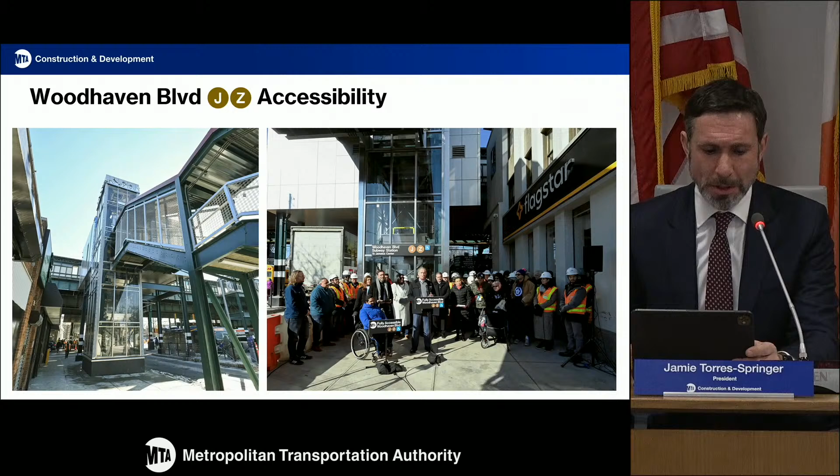Basically, we avoided relocation of a water main, working with our partners at the city to figure out how to continue to provide water service on the Upper East Side without fully relocating the main. And then we saved $21 million through effective project management that gave back allocated funds during construction that can be used for other improvements in the capital program. So $30 million savings on 68th Street, Hunter College.

We also, at the beginning of this year, opened Westchester Square, the first ADA accessible station of the year, 3 new elevators, a dozen stairways rebuilt or refurbished. That project brought in on budget, also an enormously complex project. And then last week we opened Woodhaven Boulevard on the J and the Z.

We saved on that project $40 million before a shovel was in the ground because we determined that based on how wide the street was and the difficulty in landing elevators at the mezzanine, we innovated and brought the elevators direct to platform. That saved us $40 million by not having to basically fully rebuild the mezzanine and add additional elevators to get there.

And we are using that innovation on at least 2 other stations within the 2020 to 2024 program. And we've tasked our stations business unit with looking for as many direct-to-platform elevator opportunities as possible in the more than 60 ADA accessible stations that we'll have in the 25 to 29 plan. It's an easier path of travel for our riders, and it saves us money and it saves us time getting stations done. So $40 million before a shovel was in the ground, and then $8 million additionally saved during construction.

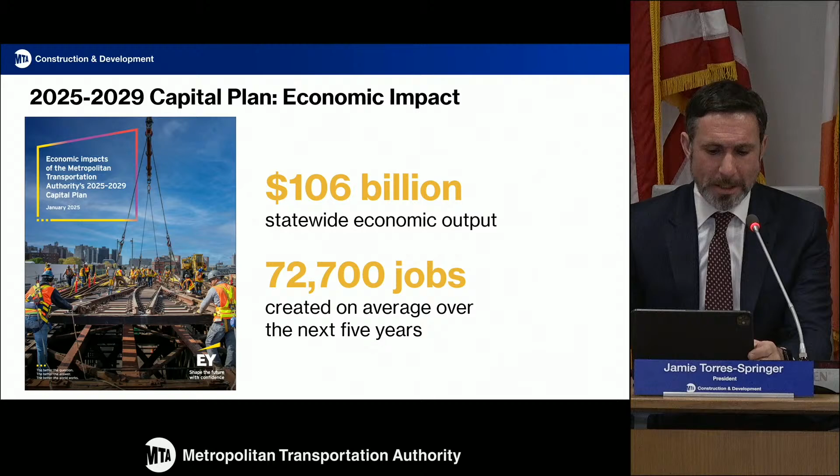We've got to get them working 100% reliably, which is something we're very much collaborating with New York City Transit on and holding Cubic accountable for. But as all that work gets done, all of our ridership groups are going to be able to use OMNY in a seamless way. And it's a much more user-friendly form of fare payment.

It's going to be available for everyone, save time and money for everyone as we get this completed this year.

Turning to future capital projects and the future capital program, we remain positioned and getting stood up as much as possible to be able to execute projects within the 2025 to 2029 plan. As was mentioned by one of the speakers, last week the Partnership for New York City rolled out an independent assessment of the economic value of our proposed 25 to 29 capital program and demonstrated job creation all across New York State from work within it.

So, as a former economic impact analyst, I can just geek out a little bit to say that a 150% multiplier on a $68 billion program demonstrates a significant return. We have the need to maintain our $1.5 trillion asset through this investment, but we also are showing a direct, indirect, and induced return on the money that gets spent all across New York State. And those 72,000 jobs, those are good jobs. They're high-paying jobs. Many of them are in regions all across the state, everything from providing equipment, obviously labor force that's employed on our projects all across the region, as well as rolling stock, which increasingly is getting produced in other parts of New York State. So very exciting results from that independent assessment.

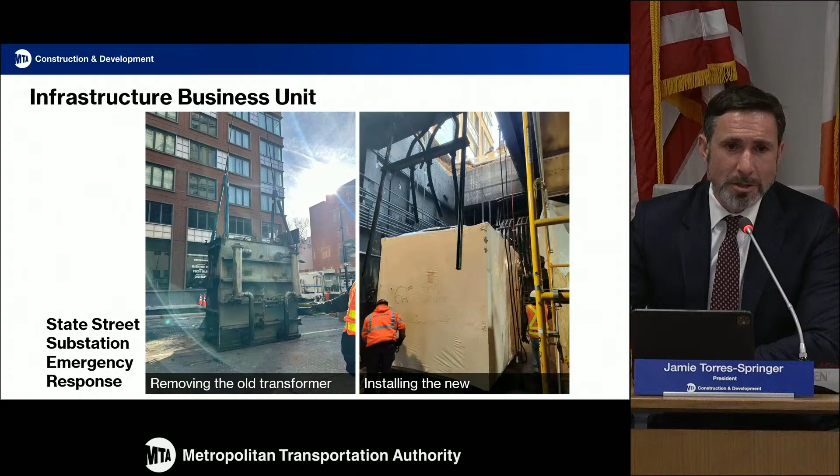And as we transition to the report from our infrastructure business unit, I just want to emphasize a couple of important points. First, this is absolutely critical state of good repair work that we're going to be talking about today, and everyone knows it's the focus of our next capital plan. 90% of the capital plan is dedicated to state of good repair. This business unit, the infrastructure business unit, doing New York City transit work alone represents about a third of C&D's work, and it is the stuff we keep talking about to keep the system running. Tunnel structures, elevated structures, power, back-of-house facilities, and resiliency.

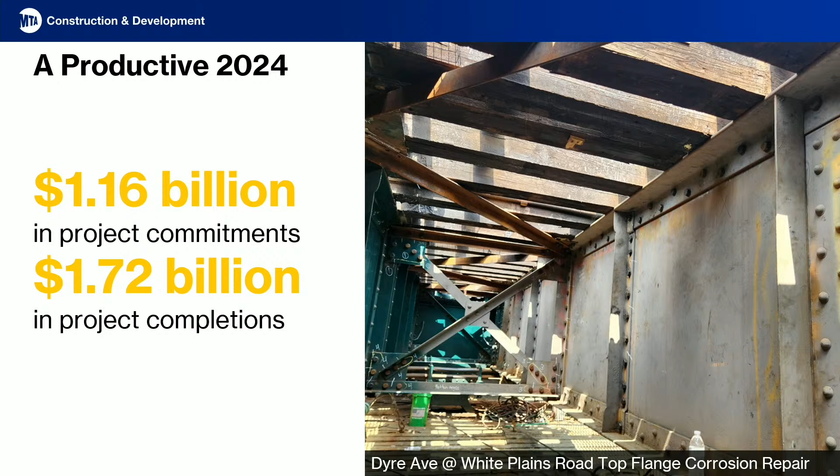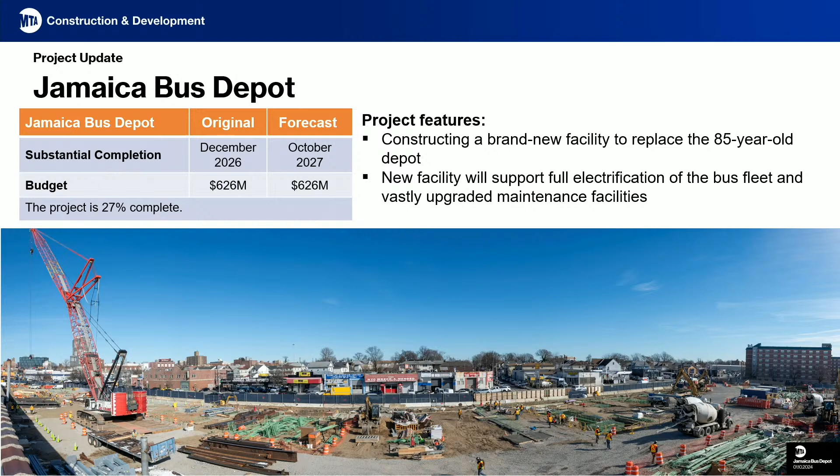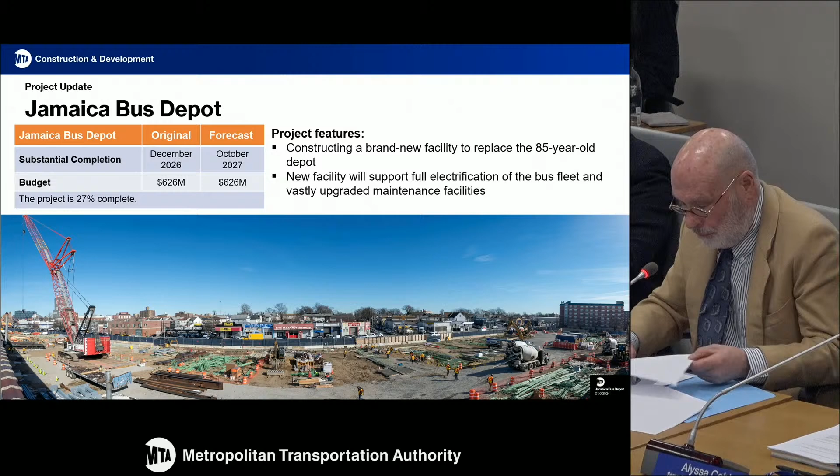So just a little bit different today. After Peter Koner, who's the head of our business unit, presents on status, Mark Roche, who is responsible for our delivery program and innovation across the whole delivery program, is going to tell us about 4 significant ways that we're saving precious dollars by innovating in how we deliver within the infrastructure business unit. And then finally, we'll hear from Alyssa Cobb-Conan, who's the new head of our planning department at C&D, about what's in our next capital plan and how the planning for that work is progressing. So with that, I'll hand it over to Peter.

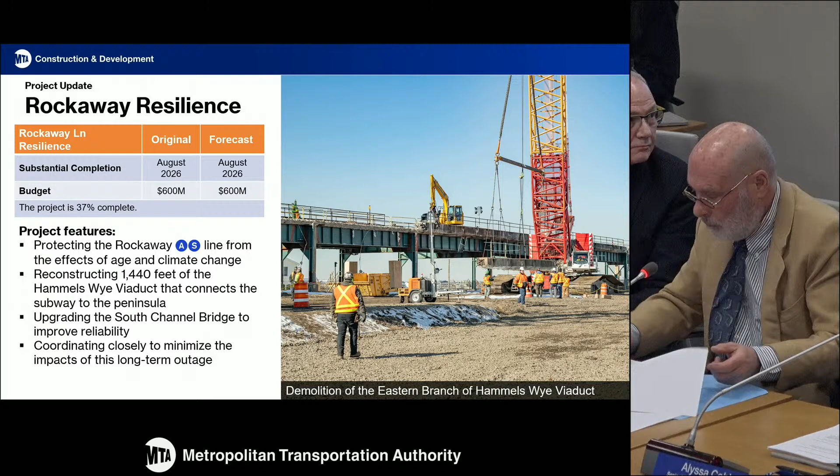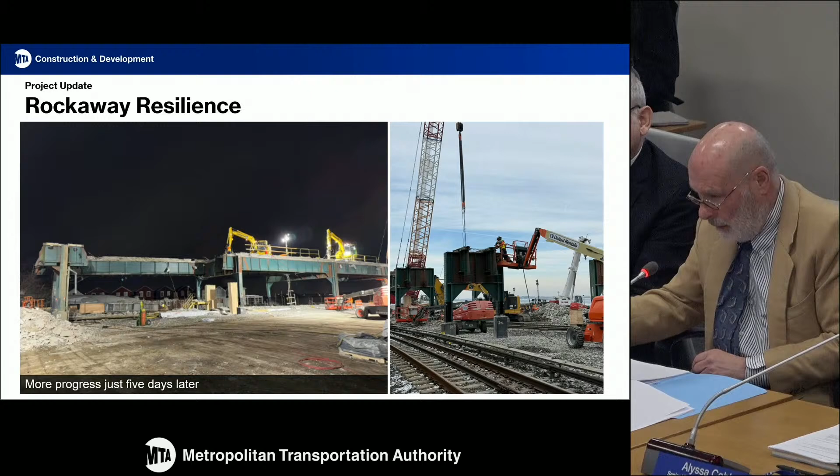The project has not accepted this delay, and we're working very diligently to reduce this delay to make sure that we deliver the project, if not on time, with a minimum delay. The forecast EAC for the project is $626 million. It's running through the budget.

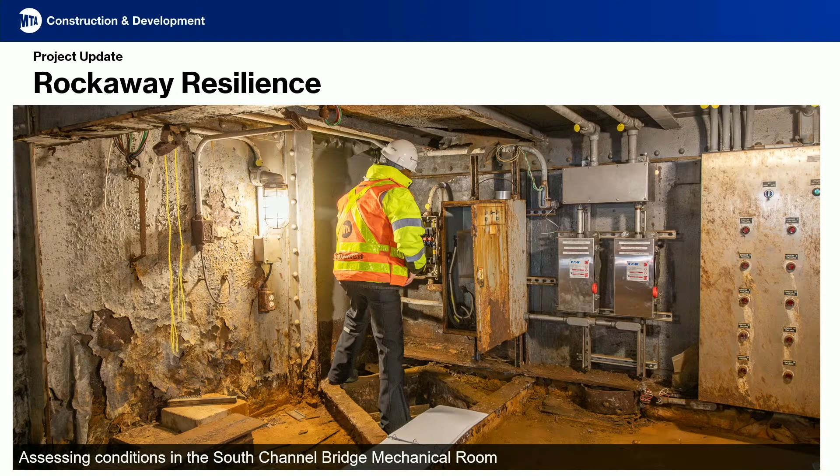Peter, let me just jump in, because I know we haven't accepted the delay. The delay is largely because of permitting issues, which became complex. But what we see here in the image, this is the new Jamaica Bus Depot facility. Yep. Actually, the steel started going up last week. Right. That building is not behind, right? That building will be delivered on time so that we can transition to the new facility on time.

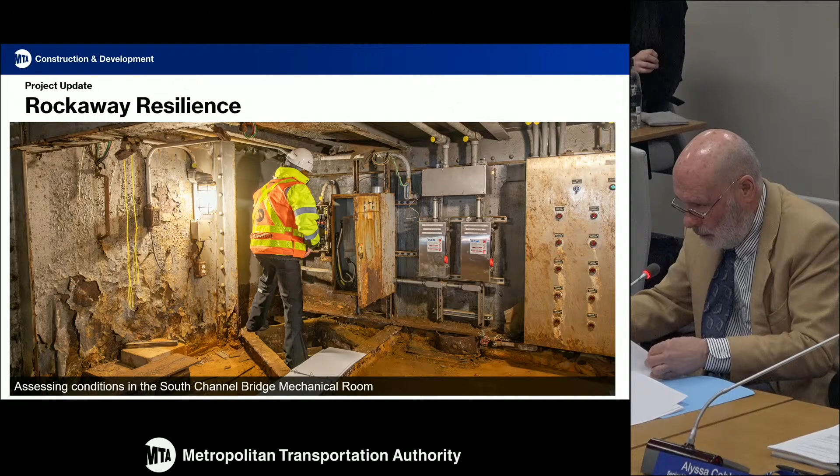At the moment, it's the demolition of the old facility and reconstruction of that component of the site. It's right next door that's running behind, but you're trying to make that up. I just want to make sure that's clear, because in terms of us delivering a project that we need for service, that's in good shape.

Our next project that I want to talk about is something that Jamie already alluded to. We have a bunch of photographs that probably are not true any longer because the project is really moving very fast. It is a replacement of the Hammels Wye viaduct, a 1,440 feet old structure that has been deteriorated through salt and the corrosive environment near the water.

As also mentioned, we are going to be completely refurbishing the South Channel Bridge that has been the bane of existence for the Rockaway folks because the bridge many times did not either open or close properly. The 17-week shutdown is afoot, and it's going very well at this stage of the game. I feel that we will be able to deliver this project, as stated, by May 19 or perhaps sooner. So the project is on schedule and budget.

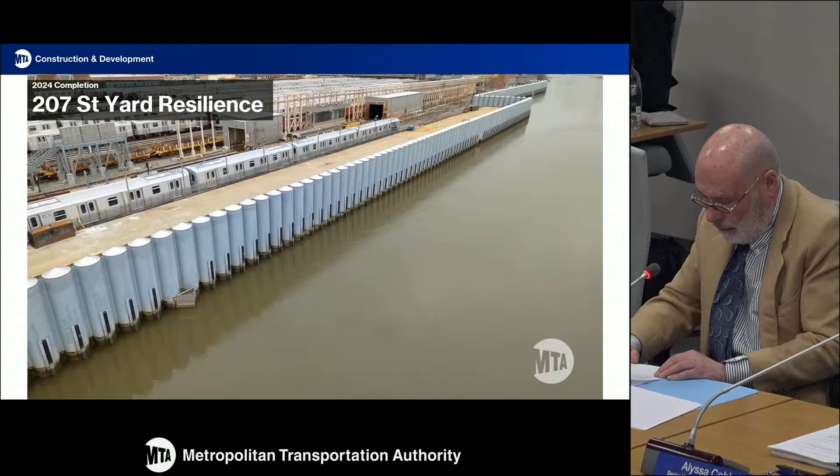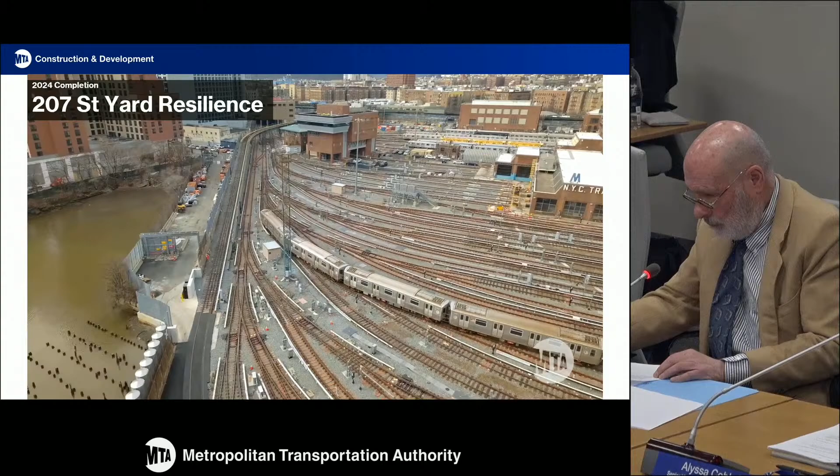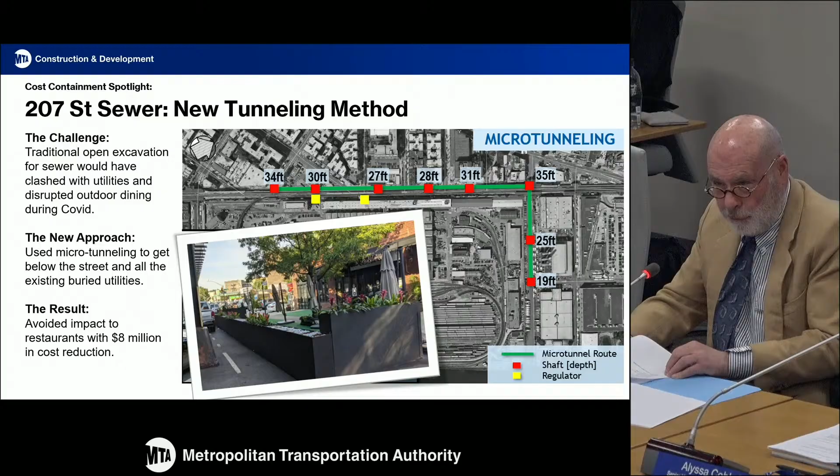Bus radio, this is a project that has been talked about for quite some time now. We had a contractor that has not really done well for us. It was a design-build project. However, I'm happy to report that the team delivered, end of this year, a project that provides fully functional voice and digital communication, enabling nearly 6,000 buses to communicate seamlessly with the bus command center.

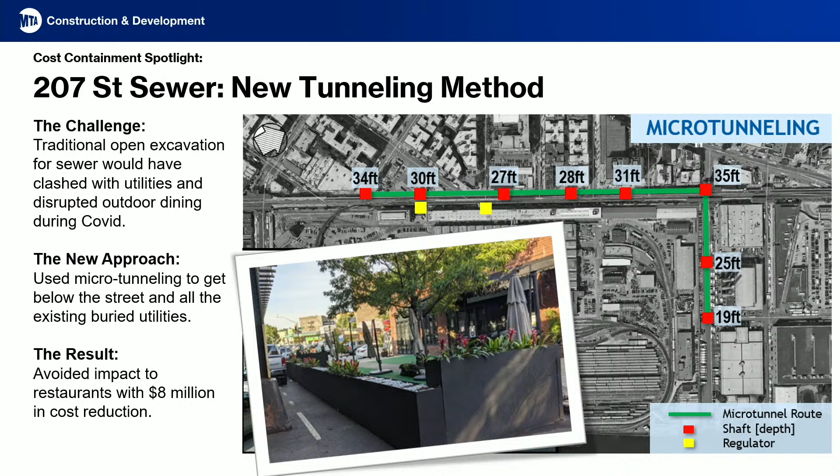We equipped the BCC, the bus command center, with new hardware and software to support computer-aided dispatch for the entire bus fleet and non-revenue bus support vehicles. We installed 35 base stations across the 5 boroughs, including parts of New Jersey and Yonkers, to ensure comprehensive coverage for the MTA bus service throughout.

Right now, you will see a little bit of a flyover over the 207th Street, a legacy project that has been with us since 2018. This is the second largest center in the New York City Transit repertoire, right after Coney Island. What you see here is 2,100 linear feet of resiliency wall that was built.

What you see, that little detent provides for a high-pressure gas valve for Con Ed. We have replaced 35,000 feet of track and 83 switches, upgraded the signal and power. Here you see a brand-new building for the signal and RTO tower, one of 2 that we built, and upgraded all the necessary infrastructure within it.

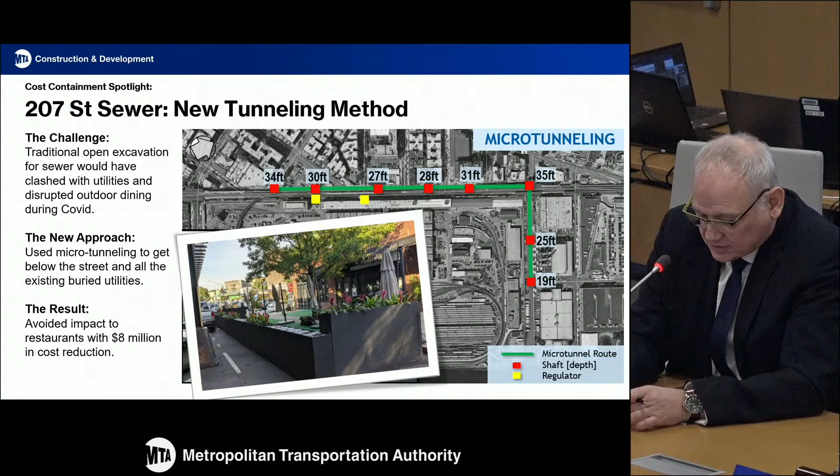Additionally, we installed a water line to service the fire suppression system for the building that you just saw, which is Building A. More of the same. What I would like to say is that this project was really done in cooperation with New York City Transit with minimal disruption to the system. And that concludes my delivery for you. I'm going to take it from here.

All nice photographs and videos from Peter, but there's things going on behind the scenes which I think are worth everybody knowing about, that I think prove faster, better, cheaper. I'd like to say faster, better, cheaper, cleverer, but I leave it with the first 3, okay? Look, Peter showed a nice video. In the background here, you can see the 207th Street, and you can see the restaurants in the street that are on 10th Avenue there.

One of the things that happened during Sandy, not only did the water come from the river, it also came up from the sewer system. It blew all the tops on the sewer manholes and came right up into the system. So to make this resilient going forward, we've shifted the sewer outside of the facility. And what you see in green there is the new line of that sewer. Every time we touch a street, it costs us millions of dollars. Every time we touch a street, we hit every single utility in the land.

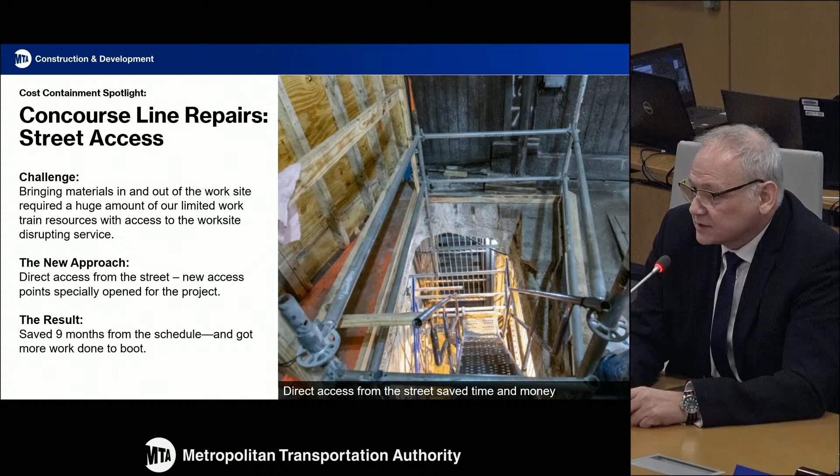This time, the team did something very different. We put the sewer 30 to 35 feet down underground. First time we've done that in MTA. And we tunneled the sewer instead of digging out the sewer. That's a first for us. It's providing us with a toolkit which we have never used before. I think we've already got 10 projects that use this method now to advance and save money on other projects. What it's done is it avoided us getting involved in the street.

It avoided us during COVID having to take away all of those street restaurants. It got us to a specialty contractor who knew what they were doing. We contracted with them directly to get the best price. This project, though it took a year longer to get it going, finished on schedule and $8 million ahead of budget. A unique way for us to involve a specialist, and you'll hear lots of specialists coming in as I talk today. The ability for us to avoid utilities is a strategy across all of our projects, and this is just the latest demonstration of how we're getting out of the way of utilities.

It's a very simple one, but it's extremely important. How do we get to our projects is becoming a major cost factor in bidders' work. I sit down and look at the costs of bids pretty much every day. I talk to contractors after they've prepared their bids and say, why did you bid that price for these projects? And every time they say, well, I had to bring this piece of material in, I had to walk this mile to get to the track, I had to bring all that hard stuff that I've got to carry, the guys are tired, I'm not getting the productivity. It's costing us 10, 20% in our projects just to get to the work sites.

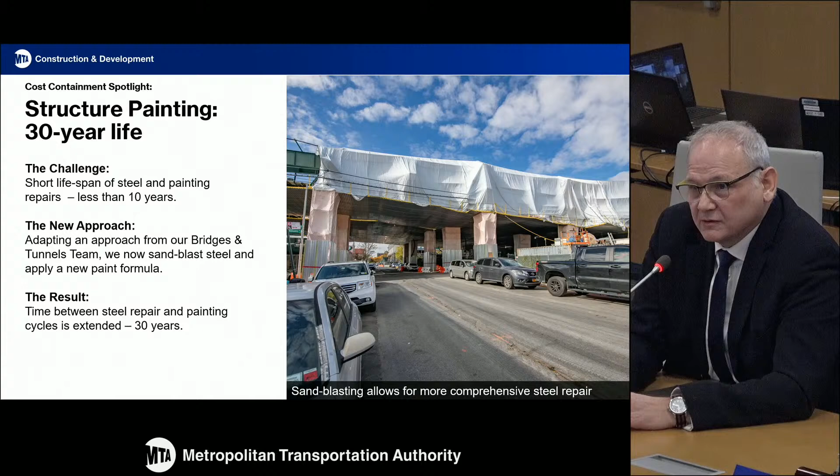Well, Peter's team did something completely different on the Grand Concourse line. They dug a hole, real clever stuff here. But they dug a hole right in the right place to stop all that long cost and all that time it takes for us to get to projects. And that is a bigger picture here that we are seeing in lots of projects. We only have a certain amount of equipment to bring materials to site. We only have a certain amount of flat cars. Every time we bring material to site in tunnels, on bridges, it affects service.

So more and more, we are taking away the expectation that contractors can use our facilities to get in and get to work. In this particular case, we got 40% more work done at the same price and got out of there 9 months ahead of schedule because we dug one hole. How do we get more and more access as we go along is a key factor across all of our projects.

We've talked about this one a couple of times before. We are saving hundreds of millions of dollars in how we're doing painting. When we spoke to you last time, we said we were going to try a new way of painting, to stop the idea that we're only minutely cleaning the steel and then painting over it. I'm not sure anybody here would do that in their own home.

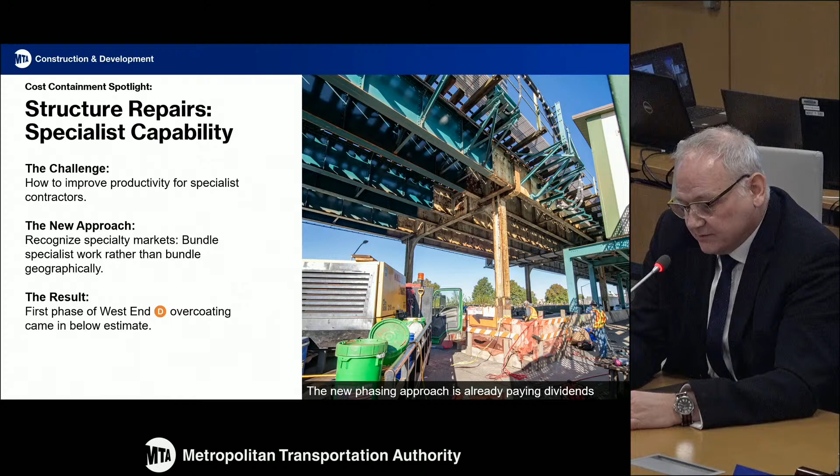What we do is we sandblast now. We've taken the lessons from B&T and all those guys on those big bridges who make their painting systems last 30 or 40 years, and we've applied that technology to our projects. So we only repair this particular structure once in 30 years, compared to what we were doing in the past few years before C&D, repairing the structure every 10 years.

Not having to go back to repair these structures in the 2030s or 2040s, only in the 2060s, is saving hundreds of millions of dollars in how we're approaching the maintaining of structures. It's a completely unique thing, and given that $5 billion is allocated in the upcoming proposed capital program for transit structures, that's $5 billion we don't have to spend in 2030 and 2040. Let's see if we need to do it in 2060.

Major improvements in preservation of our assets. This is a subtle one, but how do we get our specialists to do better, to be more productive? We have specialists all over all of our business units, and in this case it's a series of contractors who are very good at repairing steel. We met with them a year or two ago and said, how can we get more out of you? And the outcome was, well, give us more to do.

We took that to mean, okay, we're going to get you to repair the column bases, the columns, the beams, you're going to go up on top and repair it. And lo and behold, we got prices back that were 20% higher than expected. Our specialists turned out to be afraid of working on top of the structure because it has to do with closing down tracks and managing outages on trains. We don't want to spend that extra 20%, and we don't want the hierarchy of contractual problems that implies.

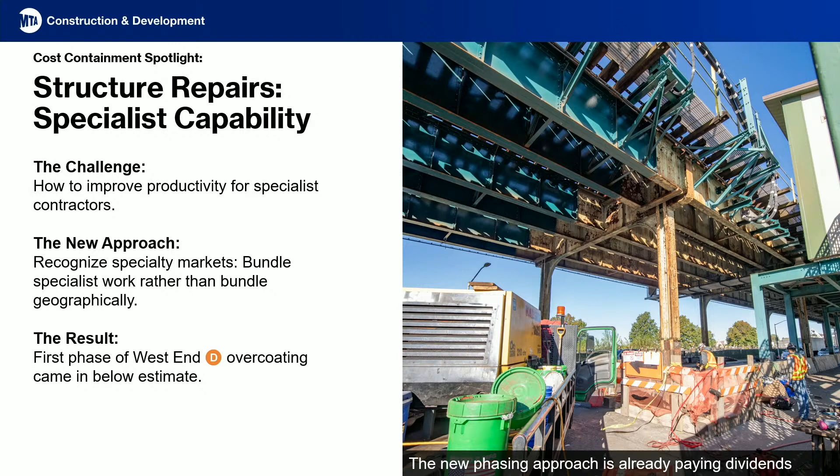In the coming months, as we give you more details, you'll see that a lot of these specialist contractors and specialist ways of working need special handling, and we need to understand our market better. We've been working with our vendors to see how to get them more productive, and that's a theme you'll see in lots of projects going forward. Thank you.

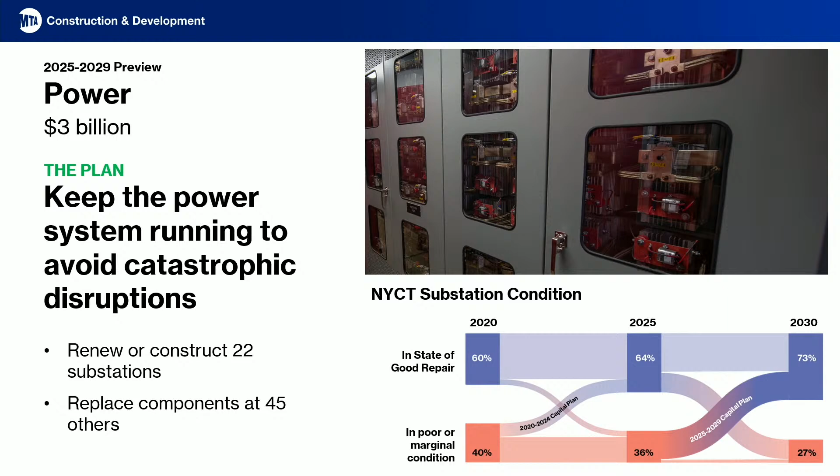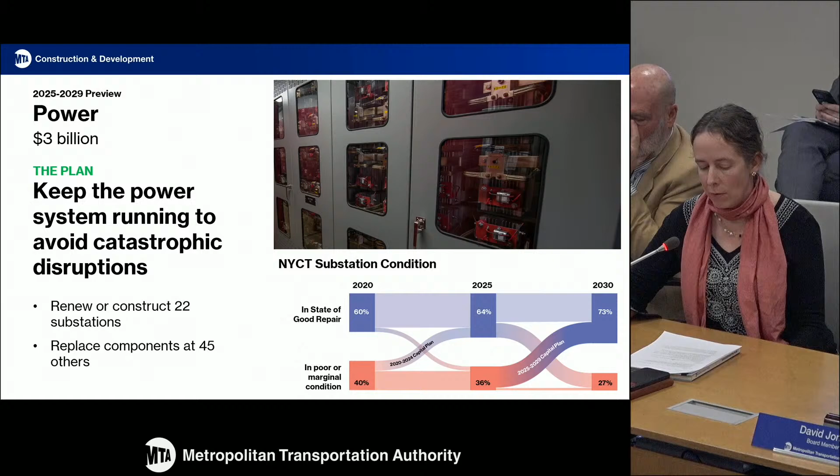I just want to echo one thing. I had the good fortune, or misfortune, of taking over East Side Access ten-plus years after it started, and brought that project in successfully. The hugest issue of productivity and cost was that the project had been designed to bring all the manpower, materials, and equipment from the Queens end, having to traverse the entire tunnel in many cases. Mark knows this. I'm not sure this approach would have been possible on that project, because we were trying to protect Garodnick's beloved Midtown from the impact, avoiding disruption to the Manhattan Central Business District, but it was hugely inefficient and costly.

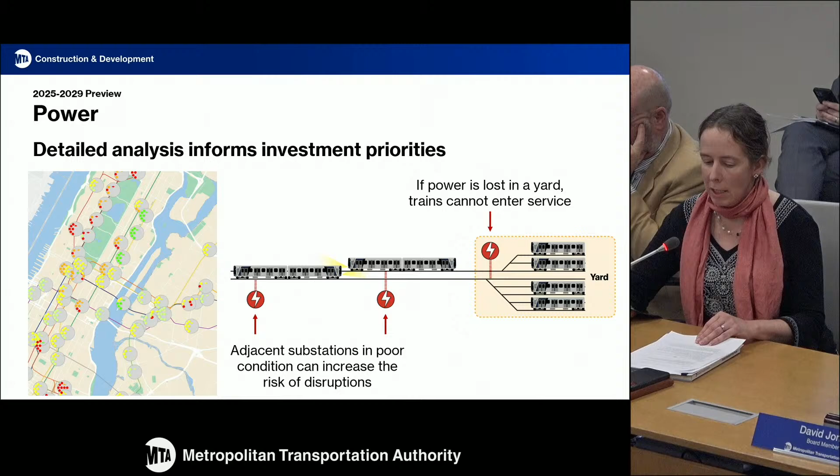So this idea of actually creating a stairway and an entry point that we build, even if it doesn't exist now, to give contractors access and minimize costs and increase productivity, is an important innovation that could yield benefits. Credit to you guys. Very, very useful presentation. As a reformed C&D hack, I love it. Go ahead.

As we've just heard, the infrastructure business unit has been stepping up to meet the challenge of getting more done. We all know that's very important because we must deliver even more. We're all painfully aware of the immense backlog of capital work we need to do, and every day that passes, we increase the cost, the risk, and the inconvenience to the New York region.

Subway power is a great example of why we need the next capital plan to keep the system running. Over 1/3 of New York City Transit's 224 power substations have major components that are in poor or marginal condition, and this risk will only grow as the equipment that provides power to the third rail continues to age. Power incidents are the most disruptive type of incident, delaying an average of 34 trains per incident, and a single incident can often delay hundreds of trains.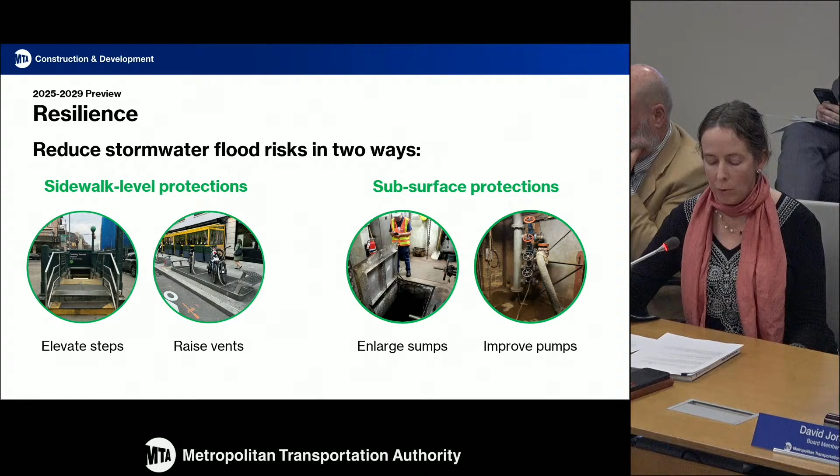The 25 to 29 capital plan calls for $3 billion for us to increase the pace of how much power work we do. This is both because we have a substantial backlog, over 1/3 of the system, but also because we know immediately behind this we have this ballooning cohort of substations that will also be beyond their useful life.

Our plan calls for us to do work at 67 substations. This is based on detailed analysis we did across the system to identify the most critical locations, such as where we have multiple substations in a row that are in poor and marginal condition, or a yard that has a substation in poor or marginal condition. This yard substation is required to give the train the power it needs to get it into service.

Another important area that we need to get more done in is resilience. We're all experiencing more frequent and intense weather events. And as we celebrate the completion of the Sandy projects that Peter just showed us, we know from personal experience that there's far more to do to protect our system.

A major focus of the 25 to 29 plan, $700 million, is dedicated to expanding our protections against stormwater runoff and flooding from torrential rain. Whenever we are hit with intense rainfall of more than 1 3/4 inches per hour, our infrastructure is at risk of floods that can severely disrupt service and cause widespread delays. We've had at least 10 of these storms of this magnitude over the last several years.

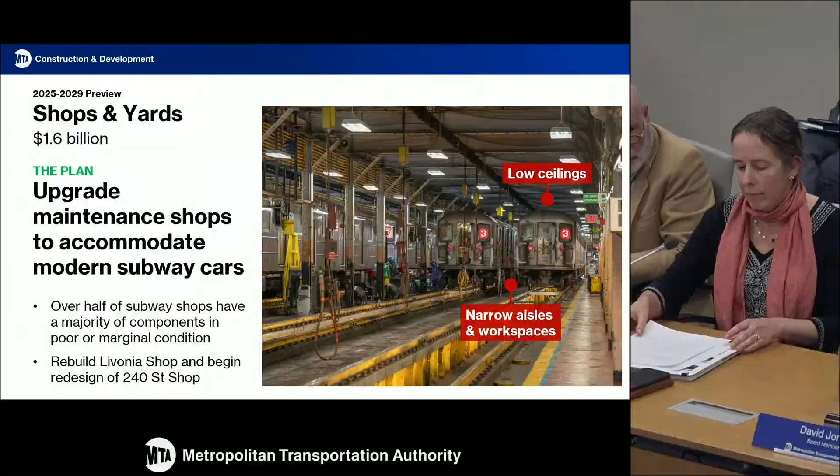Our strategy to protect the subway from stormwater flooding is twofold. First, at the sidewalk level, we need to deter stormwater runoff from entering the underground subway system, advancing mitigations in 32 locations. The second part of our strategy, we need to improve the infrastructure below the sidewalks that removes water from the subway tunnels. The equipment that does this is located in pump rooms.

We have found that incidents and delays due to weather are 2.5 times more likely in locations served by pump rooms that are in poor or marginal condition. And the 25 to 29 plan calls for investment in 14 of the poorest performing and undersized pump rooms.

Finally, as this board knows, we need to increase the amount of capital work we get done in our subway shops and yards so that we can provide safe and reliable service by inspecting, repairing, and cleaning the rail cars. Unfortunately, our shops and yards are among the poorest condition assets. The $1.6 billion investment in shops and yards is a need that's been identified for decades. If you look back over our past 20-year needs, we have identified over and over again the need to rebuild our shops. And over again, it's among the first to be cut when there are budget constraints.

Many of the shops were originally designed for rail cars from a completely different era. Two of our oldest shops, Livonia and 240th, date back to the early 1900s. They're so out of date that our teams at these shops cannot perform maintenance of any rail cars built after the 1980s. As we replace our oldest rail cars, which we also must do to provide reliable service, we must have the shops that can service them.